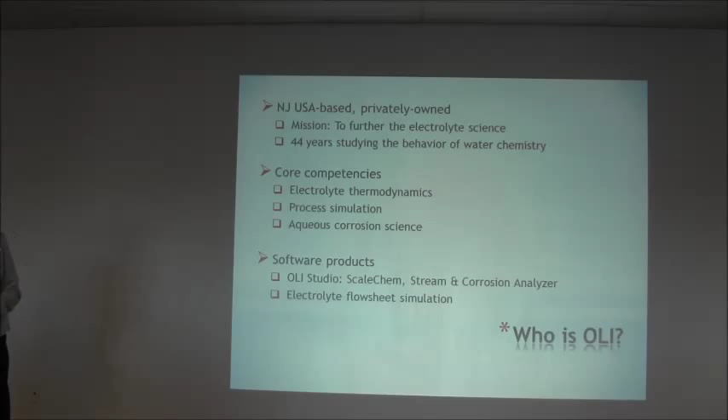Who is OLI? It's a very unusual company based in New Jersey, and it has spent 44 years devoted entirely to electrolyte thermodynamics. The founder, Marshall Rafal, decided when we met at Exxon that he was so interested in electrolytes because they're very poorly behaved mathematically. He became very interested in the challenge of how to converge electrolyte solutions, and that's kind of how the company grew.

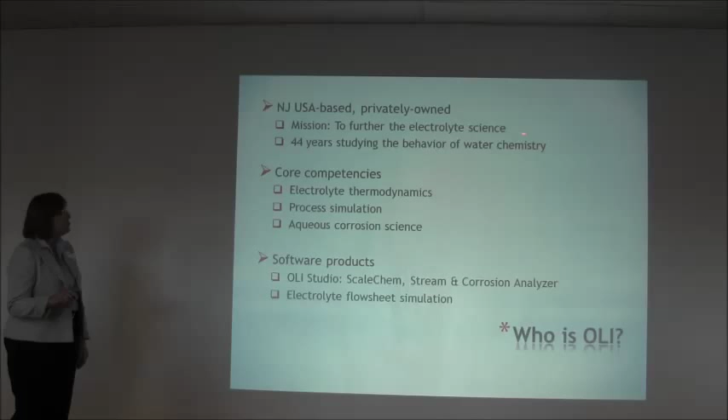So its mission, as I say, it's a very unusual company. Its mission is to further the electrolyte science. In a way, it's a quasi-university, but it does have a commercial arm. Core competency: electrolyte thermodynamics, process simulation, and we also do corrosion science of the chemistry in contact with bulk solution.

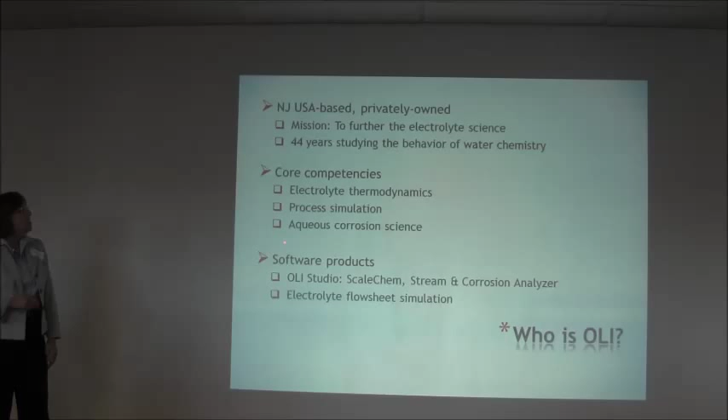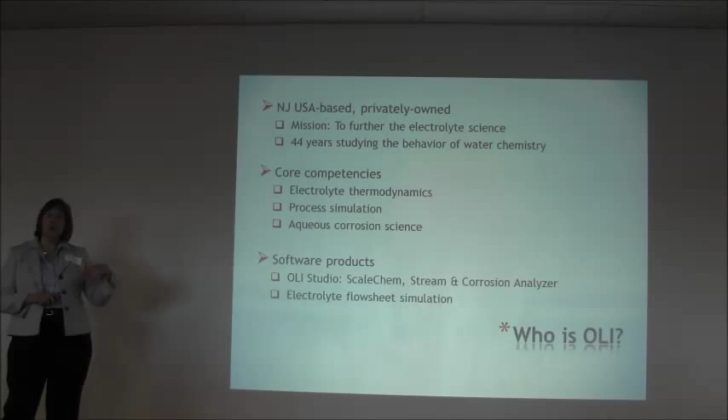Primarily, if you work with OLI, you work through their products. You work through either the OLI Studio, which has a bunch of software components, or you work through electrolyte flowsheet simulation, where you're developing a water plant and you want to work inside a commercial simulator, such as Aspen Tech or PRO/II, and they have their own simulator as well.

So what am I doing here? Well, actually, our mission is a little bit different. Our mission is to help clients address water chemistry issues. I'm a principal, my partner AJ is a principal.

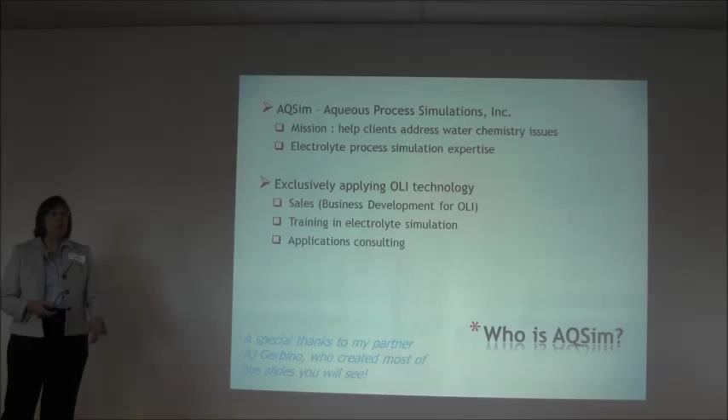And we have to thank AJ. He probably would be a better person to come because I want to talk about applications today, and he's a much better applicant, a process simulation specialist. But anyway, he's helping create most of these slides.

So what we're doing is we are basically trying to apply OLI. We do that exclusively with OLI technology for sales training and applications consulting. What we offer is electrolyte process simulation expertise.

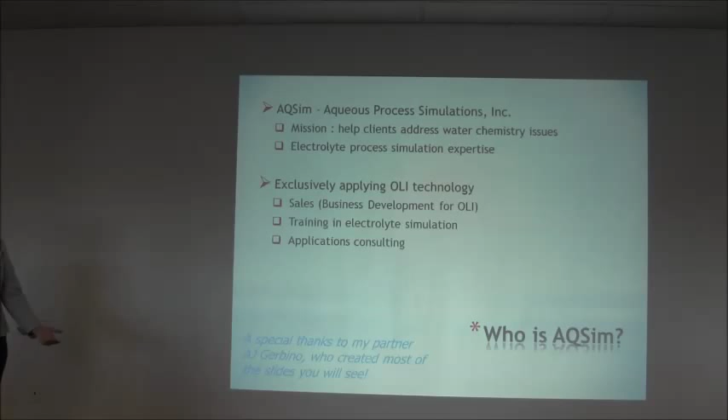Why do you want to use simulation, and especially why do people use simulation to begin with? What we're trying to do is duplicate a physical process, and we're trying to do that through what we call first principles, applying electrolyte thermodynamics. So through chemistry and mathematics, or physical chemistry, we're trying to duplicate what it is that you're seeing in reality. That can apply to production chemistry, it can apply to water treatment.

Why people want to do it is if you can duplicate a physical process, then you can identify problems before they occur, although a lot of my case studies are talking about problems after they occur. You can also predict where to treat for scale, find safe ratios if you're mixing waters, and also screen out different treatment methods.

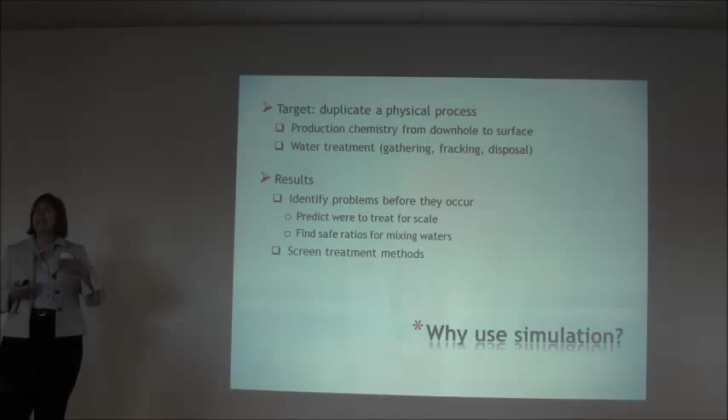OLI is more focused on understanding what the problem is than on understanding what the solution is. But you do have to understand the problem before you can find a solution, and they're really good at ferreting that out. We'll talk more about that.

I really want to thank Steve and Vince, especially Steve's talk, because he took a lot of the pressure off me in terms of saying what is scale, how does it develop, how are particle sizes, et cetera. So we don't have to go too much into that, but we'll go a little bit into the underlying science. Then we'll talk about the limits of when you have this kind of model, when you're worried about scaling, what are the limits of scale prediction. Then we'll talk a little bit about case studies, and then some of the challenges.

I have two parts to this talk. This is the first part, about scaling. I'm going to give a little bit of talk, and after we talk about scaling, we'll move into corrosion simulation. OLI fits high-end. It's high-end in scale prediction, and it's high-end in corrosion prediction.

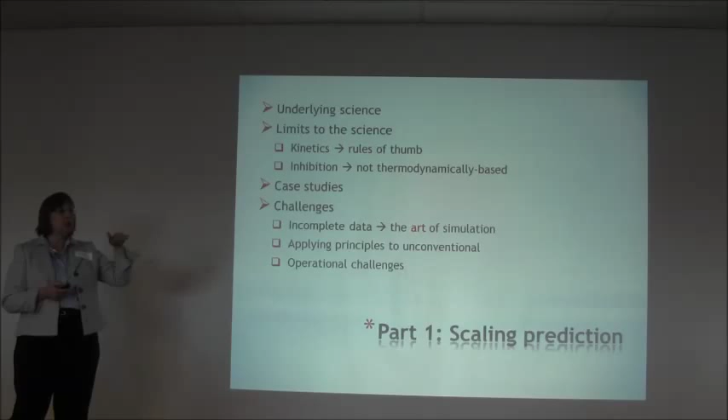Our corrosion tool is a little bit of a research tool. Our scaling tool is much more applicable to day-to-day problems. But we'll talk about both.

So we've already understood this: scaling tendency. What we call scaling tendency is the thermodynamic driving force for a solid to precipitate. Thermodynamics works on energy, it's all about finding the right energy of a state. So what we say is a scaling tendency greater than 1 means it's going to precipitate.

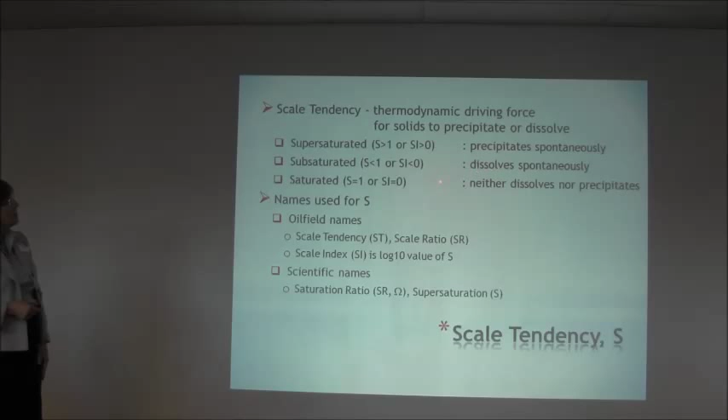Less than 1, it's going to dissolve. If it's at 1, at saturation, which is an important part that determines your solubility, then it's not going to dissolve or precipitate. We call it scale tendency, scale ratio, saturation ratio, or supersaturation. If you see the word 'index' in a scale tendency, it means that it's the log. So we work with the scale tendency as a number, and you can also work with the log, which is called the scale index.

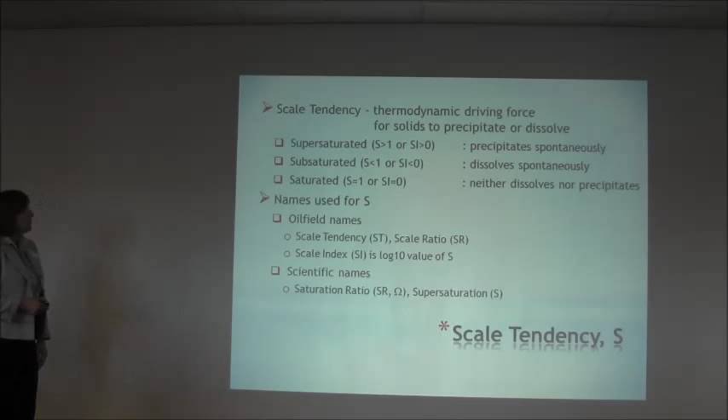We've talked a little bit about Langelier, Stiff Davis, Oddo-Tomson. We could start using scale calculations, we can move into empirical methods, and then we can move into the full speciated model. So when you're working with a simplified model, you can calculate this.

Classically, what they have been is to calculate a measured concentration divided by the concentration at an equilibrium state, and if it's greater than 1, you're going to scale. So that's been the kind of rudimentary way you could say it.

When you look at it from a thermodynamic point of view, what we're saying is the activities divided by the solubilities. What does that mean? So in thermodynamics, we talk about a reference state and then an excess state. We talk about an equation of state to define an ideal state, and then when you're past that, we talk about excess properties. So reference state, excess properties.

Because that means that ions are not attracting each other. Infinite dilution means that there's no effect, they're not having an effect on each other. When you're in the excess properties, when you're in the activity state, ions are impacting each other. It's not just the calcite, it's not just calcium ions and carbonate ions, but it's all the ions in your soup are impacting each other.

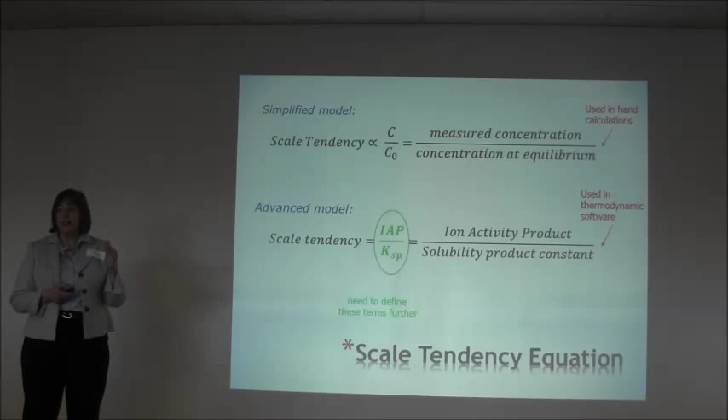So what we're describing is we're saying the activities, the ion activity product divided by the solubility product. And that's the definition of scale tendency in a speciated model.

Okay, a little bit more, and then we're going to stop with the slides. So if we just take barite, and barite breaks into the barium and the sulfate ion. And so then here we're looking at activities. Activities are based on the molality of the solution with the activity coefficient divided by the K value.

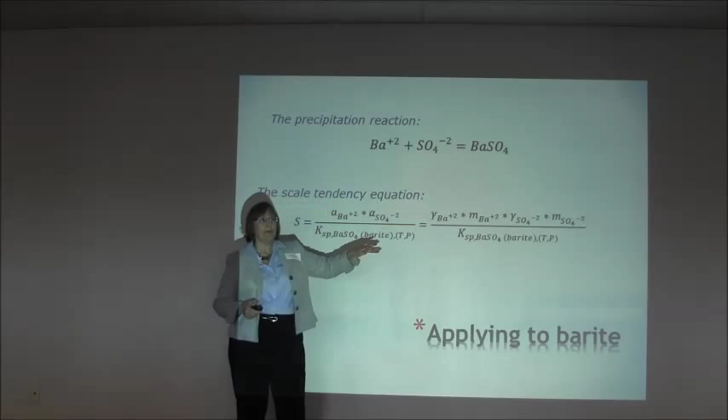You don't really need to remember this. All you really want to think about is activities divided by solubility, excess properties divided by reference state. And that's actually what produces the scale tendency on a first principles basis.

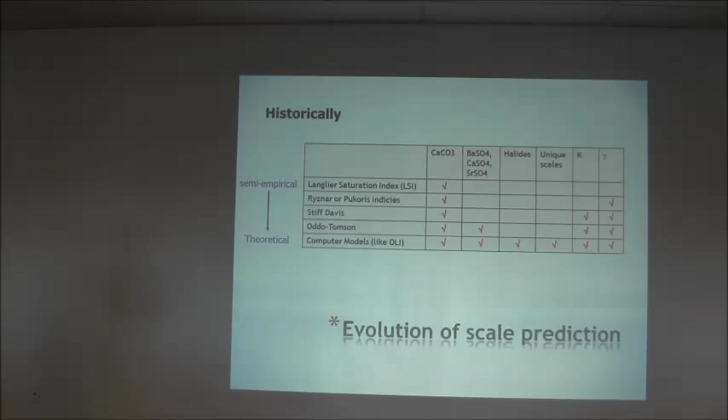So we talked a lot this morning. I was like biting my tongue. And I also am just totally embarrassed to say that I should have had French Creek in here, and I really apologize. And if anybody goes back and tells Bob that I didn't, I will come find you, because he really should be in here too. And I don't know why he's not, because this blah blah. Anyway,

So why do you want to use a computer model like OLI, or why is it important? There are plenty of good indices.

Langelier did have some problems. It went down to Stiff Davis. They fixed it. Stiff Davis was taking more of the common ion into effect, so he was staying over there. Oddo-Tomson is great, that actually is the Rice University Brine Chemistry Consortium, and they actually worked really well on a lot of their solids.

And a computer model like OLI, what is the advantage? I would say, by the way, Oddo-Tomson's probably in this box already, but I don't really know. But basically, when you have things that are not predicted in your water, if it goes beyond the standard oil field scales that we've studied traditionally, then it's really good to be in the speciated model to be able to just account for what's in your water sample.

So it's a higher tech way. Once you've got all those great water analysis methods that Vince was talking about, it's a higher way to get into, a more precise way to get into an actual scale tendency.

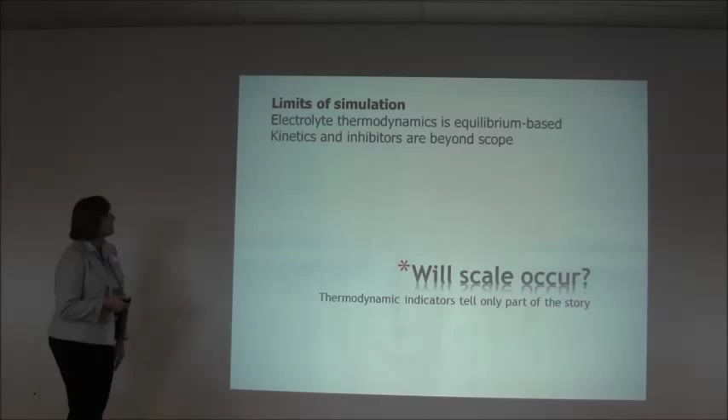Okay, that's all the good news, but there is some not so good news about scale tendency, which is it's only equilibrium based. It has a huge disadvantage in that kinetics and inhibitors are beyond the scope of a thermodynamic model. I'll talk a little bit about why. It's easy to understand why.

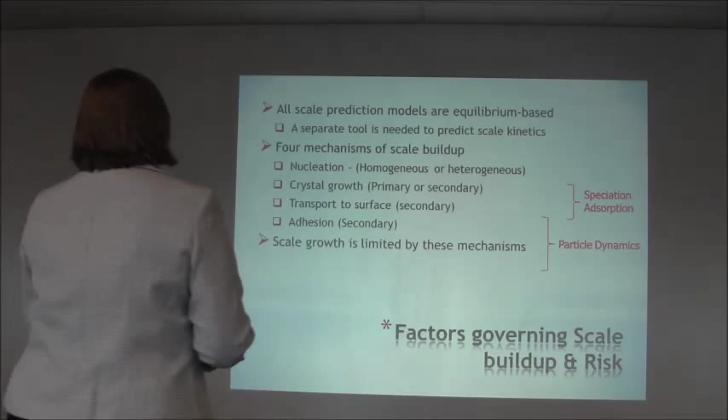So all scale prediction models are equilibrium based, and you need to add on something to calculate kinetics. Kinetics can be pretty simple. We'll talk a little bit about what that could be. I'm so glad Steve talked about this because I'm not going to talk about it. Actually Vince did too, the difference between a scale and a deposit.

We don't actually go there. We're only talking about energy, the thermodynamic driving force for scales to precipitate. Nucleation is an issue. Does it have something to latch onto? Is it going to latch onto the wall? I recall Vince's description where you put one drop into one piece of scale to let the nucleation start, and whammo, everything starts.

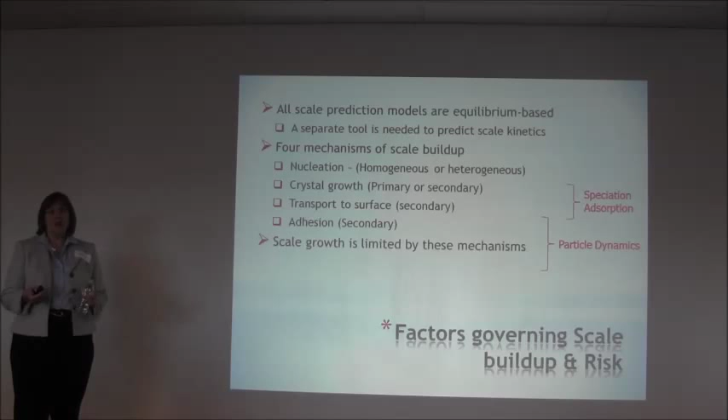So there's all kinds of mechanisms for scale buildup when you get to finally understanding what's going to happen. Is scale going to be a problem? All we really want to talk about as thermodynamicists is basically the driving force: do you have a problem? Is your system going to have a problem? And then sure, all these things are going to be hit to try to decide whether or not you have a problem in terms of crystal growth and things like that.

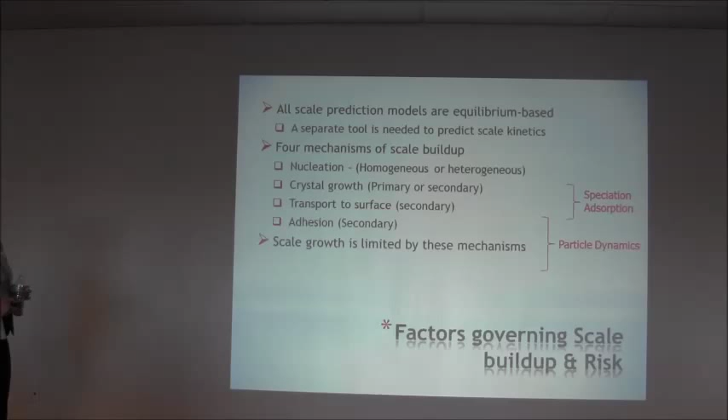So one of the things that we do as consultants, because remember I said that AQSIM has started to sell OLI software, we also consult with OLI software, so we're applications people.

We take information like this, and we've created this particular slide for our own reference, and what it's doing is for the oil field scales that we are most interested in, the halite, the gypsum, the calcite, the barite, and we've just developed timetables for kinetics.

This is a log-log plot of saturation ratio versus time, and the symbols are the scale tendencies, the saturation tendency ratio. So that means that your scale tendency on gypsum, for example, can be much higher. It can be up at 10 if your induction time, the time in seconds, is only going to be 10 seconds. What that means is if you have something flowing really quickly, it's not going to have time to nucleate and adhere. So even though we're worried only about the thermodynamic driving force, you can see that there's different ways that you can calculate.

Okay, even though the program said the scaling tendency is 4, is that a problem? Well, no, it's not necessarily going to be a problem. It depends on how fast it's flowing or how stagnant it is. It depends on a lot of things. So what we're going to tell you is it's 4, and then you're going to figure out, okay, is that important?

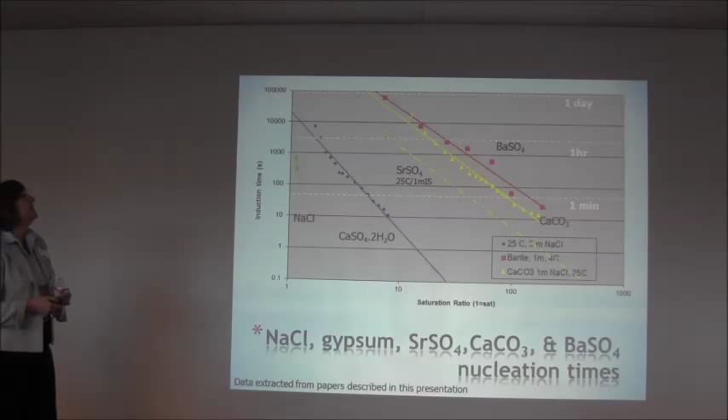Also, inhibitors. This is an interesting slide. If you look at the 3 curves here, this pink one, the green one, and this blue one, that's the growth of calcite on a metal without PPCA. Okay, so they put an inhibitor on this, and then you can see it's much better behaved.

So we don't do this kind of inhibition modeling. And why don't we do it? Because we had a great description of what inhibition's doing: it's not thermodynamic, it's not working on energy, it's working on interruption, and we don't model that. Our models don't do that. Scale tendencies don't model that. So kinetics and inhibitors, you kind of have to get extra. You have to get it, and where you usually get it, by the way, is from chemical treatment companies.

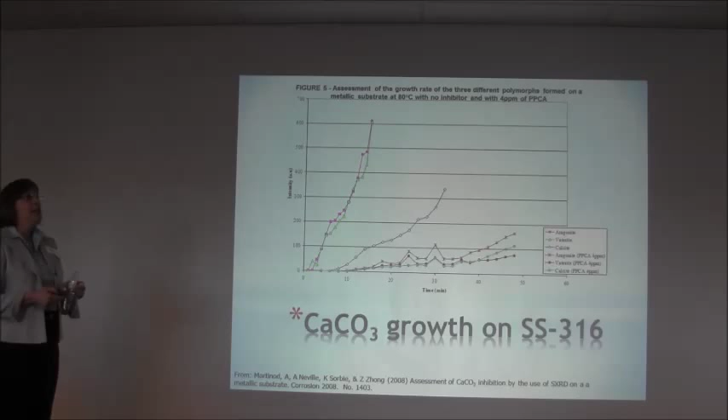But you don't really know what you have, so you don't know how to treat it. Your chemical treatment company doesn't necessarily know what you have, and that's really where we come in. So why do you need us? If you're going to go to the chemical treatment company anyway, why do you need us? Well, you really need to understand the problem.

I love Vince's things about the knowns and the unknowns, the known knowns and the unknown unknowns, and all of that. Because what OLI offers, and what a good scale tendency program can do—any program that can properly predict scale tendency or pH, and I do consider French Creek a good program like that—is give you what you need, which is mass balance and scale tendency. That, if you apply it correctly, will really show you what your problem is.

So let's talk a little bit about how we do that. We can use it as a simple well scaling analysis. We can use it if we're mixing waters and want to understand whether waters will mix compatibly or not. And we can do it for treatment after we've mixed, or after we've produced them. So that's why and where we want to use it, and let's look at how.

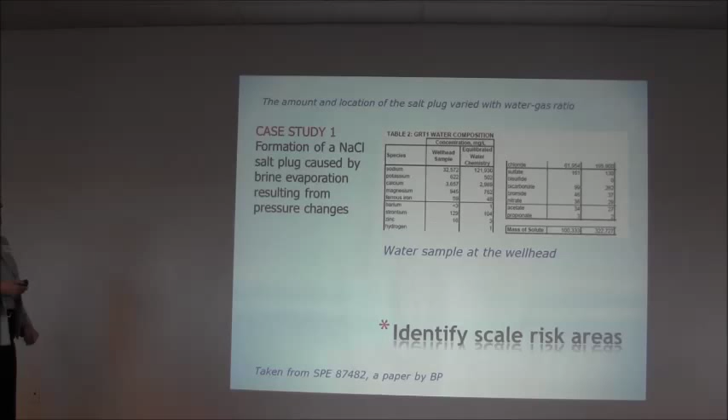Let's look at some examples. I have three examples in the scaling tendency set. Two of them we picked because they were already made as SPE papers. One of the problems with our industry is that everything is done under non-disclosure agreements, so we're limited by what we can say. The third one we picked, we've changed the names quite a bit, although it did happen in Australia.

But in this one, there was a well, and it was plugged, and they wanted to understand how to treat it. So before you just go ahead and do the treatment, you have to understand why it plugged and where. So they knew enough that it was plugged by sodium chloride.

And they had a water sample. I love how water samples don't really help very much. Because why don't they help very much? Because it's already done—like if you've been precipitating in your well, by the time you get to the water, there's nothing left. So it's kind of like you have to recreate it.

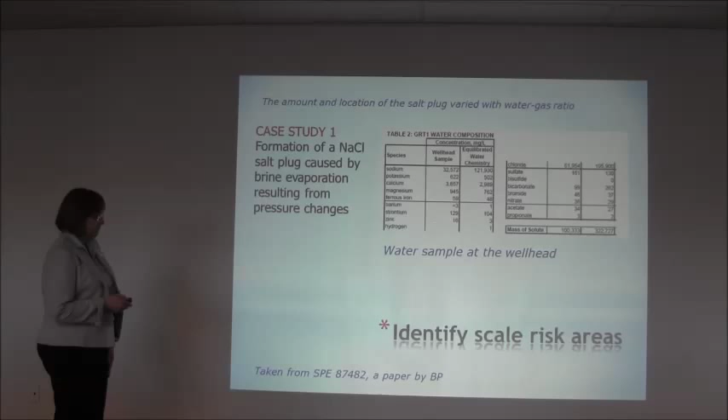So basically, we got a water sample. The water sample was pretty innocuous as far as we could tell, and it didn't really show any other problem. So what we had to do—and this is why I asked the question about formation—you have to recreate what happened. You have to recreate it from downhole up, or formation up.

Now how do you do that? Well, you have to know information. You look first at your well sample, but you also have to know information about your formation. So if the Marcellus Shale is all the same everywhere, then you know it. But if you don't know that, or if there's an area that's particularly a little funky or different, you try to understand what the formation is, and you recreate it.

You run a saturation calculation, and you recreate the reservoir—what we call the reservoir brine. So you recreate what the brine is, and then you pull it up through different temperatures and pressures. Now the strength of thermodynamics, and why thermodynamics is an important science, is that you don't lose mass, right? So we're going to keep the mass—we create it from the downhole conditions and pull it up through different temperatures and pressures.

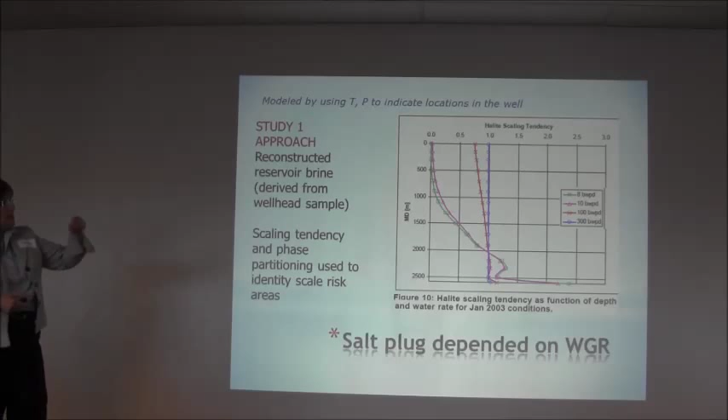And guess what? As it goes through pressure drop and temperature changes, the state of the solids is going to change. So what was vapor in the formation, as it's coming up and cooling, water's going to condense, things may get diluted, solids may form out—it depends on the particular solid. So the only thing we did here was reconstruct the reservoir brine, then pull it up through a series of temperatures and pressures. That's the approach.

This is what we call phase partitioning—that's the other thing, so it changes state. Thermodynamics says that if you understand the state of one situation by conserving its mass, you can predict the state over here, and over here, and over here. As the state changes, nothing else is changing; it just depends on what the energy of the system is. Temperature and pressure are being withdrawn or added, and that's what determines how you think about things.

So what we were able to do is create this graph of depth. Now, we didn't actually use depth in the program, because a program is totally talking about temperature and pressure with thermodynamics. So we only think in terms of state—temperature, pressure, and composition. We drew it through a series of temperatures and pressures that simulated the well, and we started to see what the scaling tendency was doing.

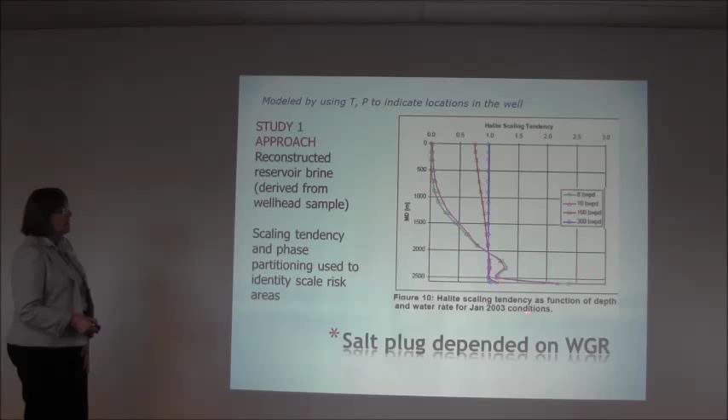So one, and then you can see it starts to come over here, and this is where the problem is. That's how this case was worked. From that we took the temperatures and pressures back, and we were able to understand that there were two places: there was a plug that formed entirely in the tubing at that particular spot, and then there was scaling along the tubing more, and then it also plugged up there.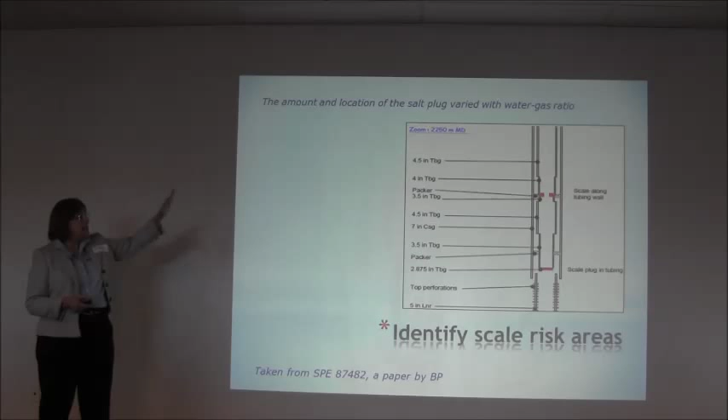We could do that by understanding temperature, pressure, composition, deriving a reservoir brine—because we understood about the formation—and taking that wellhead sample, coming down. So that's kind of how you get a scale tendency.

Okay, throw that one away.

This was a well in Australia, and it was corroding. Our client came to us and said, okay, we're seeing really crazy behavior—we're seeing carbonate scale in this horizontal section of pipe, and then as we're bringing it up, we're seeing all corrosion here. We have no idea, we don't really know.

So this is kind of like another detective case, right? We don't really know—should we change the metallurgy? Should we treat it? What should we do? Is it a particularly aggressive scale? Maybe we need to punt.

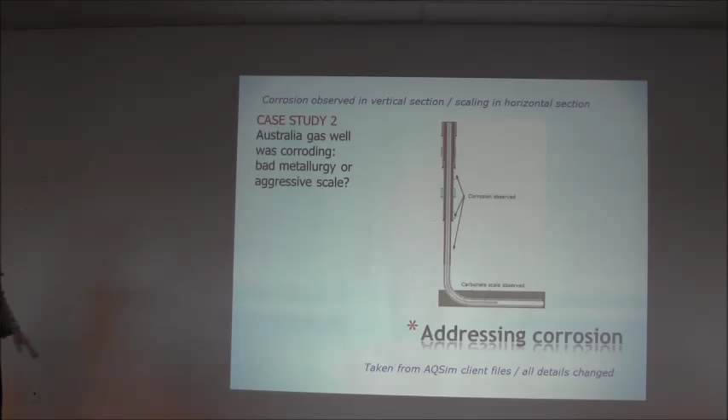So what we found was that this was really a case of alkalinity not really helping us, because alkalinity was dropping. Why was alkalinity dropping? Alkalinity was dropping because as we head back to that place and the pressure was dropping, carbonate scale dropped out. So carbonate scale dropped, but the carbonate wasn't bound in the solution anymore, so pH is dropping, right? So that was one thing that happened.

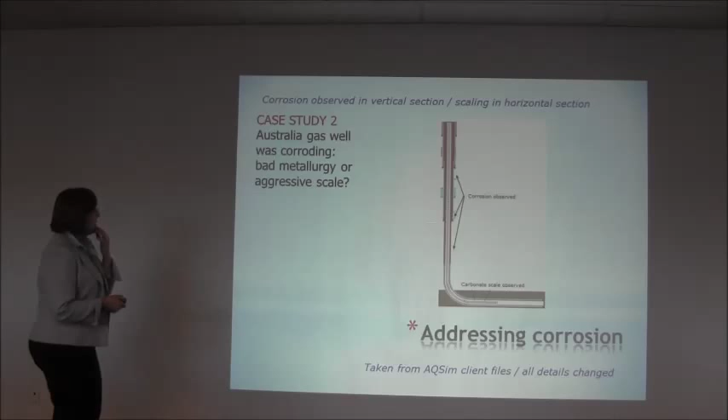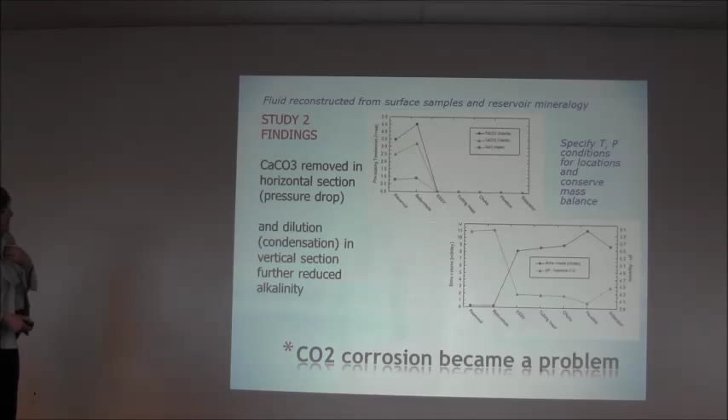Then another thing that happened is as we came up that vertical pipe, it started to condense, and that further diluted the alkalinity and the pH. If you look at the graph, you can see the pH just kind of went nowhere—it's this lower one. So the pH went down as first the carbonate left, and then the water came and diluted it. The moral of the story was that it was CO2 corrosion caused by lack of alkalinity, you can see.

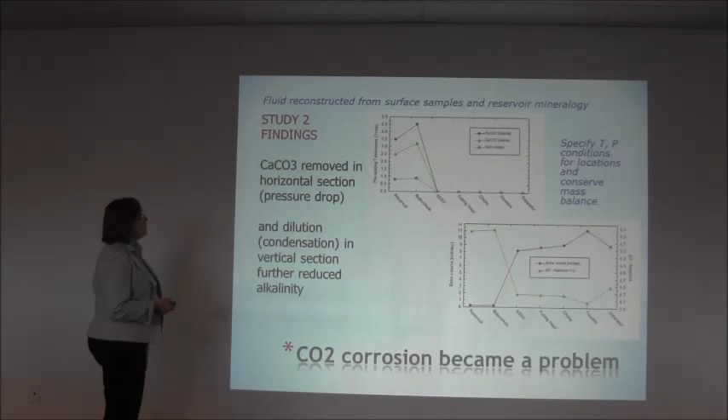And from that, they were able to determine how to treat it so that they didn't have to replace the tubing that they had, which was really good. That's another way to apply the scale tendency, really—that's all we're doing. We were looking at the changes of water and what scale is forming as we went along.

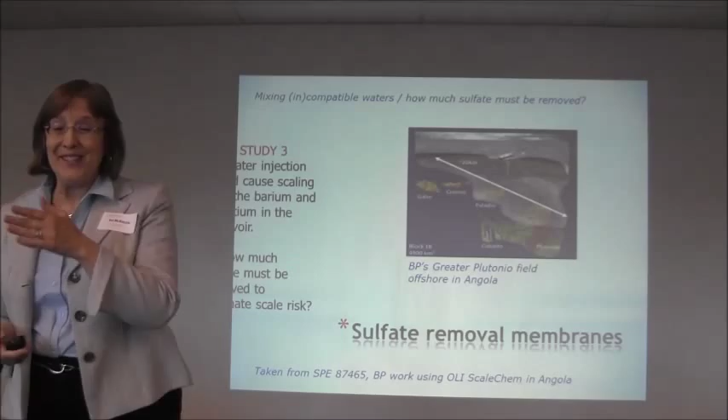Okay, this is an interesting one. This was in Angola, and what we were trying to understand—they knew that they had injection water. This is a little bit like fracking. They knew that they had an injection water and they knew they were injecting seawater because they didn't have any other water source, and they were going to put seawater into the formation. They were a little bit worried about barium sulfate because, as Steve said, barium sulfate is really very insoluble.

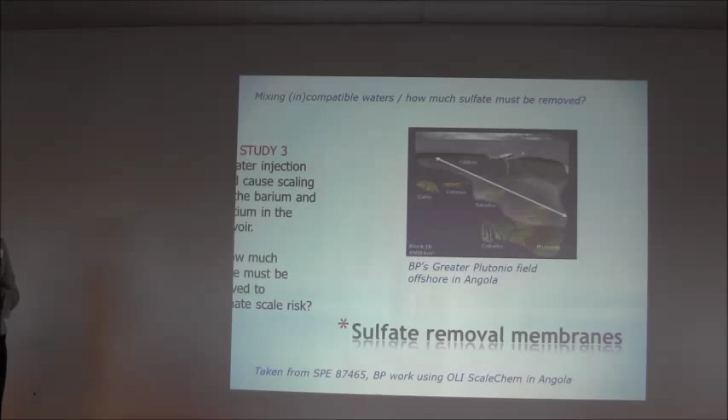So they wanted to—and they already knew they needed to do sulfate removal of their injection water—so they were already going to treat their injection water so that it wouldn't cause problems. And they wanted to know: how could they mix the waters? What was the safe ratio? That was the question.

Very bad news. The answer.

So what we wanted to do was simulate the mixing water. We calculated what at saturation the formation water would be. How did we know the formation water? Well, we knew where they were. They were in Angola, offshore, and we know what the formation is of the wells that we were treating there. So that was an advantage.

Again, it comes back to my question: do we go into the Marcellus shale and know what the formation is? Because what we did, since seawater was the only water source, we were able to calculate by mixing waters, and we did all these percentages.

So we said, okay, if we added 0 to 100% seawater, is there any chance we could leave 2,700 milligrams of sulfate in the water? No, no chance, don't do that. You look at your scaling tendency - this is scaling tendency, this is the percentage of seawater. That's not going to work. We just kept running it and running it. We got down to the point where 95% of the sulfate had to be removed, meaning there was no compatibility. Those waters were simply never going to be compatible.

How do we know that? We know it just by temperature, pressure, scale tendency, and that kind of gives you a good problem description so that you can take it for treatment.

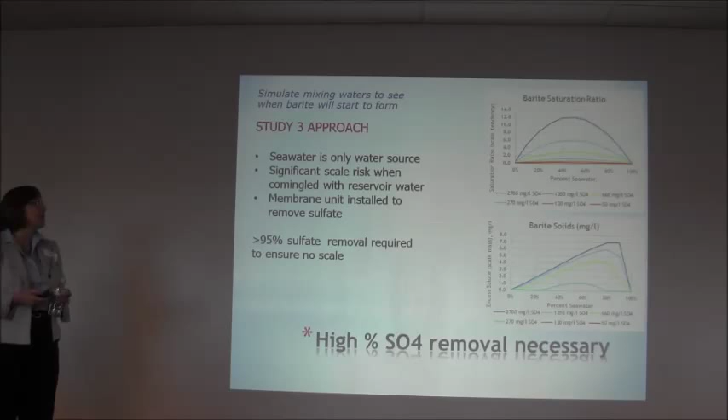Okay, that's all I'm really going to talk about there. I didn't actually have an example - I wish we had an example of produced water treatment that comes after, either in disposal, trying to get rid of the water, clean it up enough so you can put it back to wherever it came from. Because we can also help there by doing specs, specking up what has to happen to get 10 parts per billion into a particular phase. And that's also something thermodynamics can help us with.

Challenges. I loved the talks this morning about water samples, because fortunately it's not my field, but actually you have to have - I love this - a representative water sample. That's not always easy.

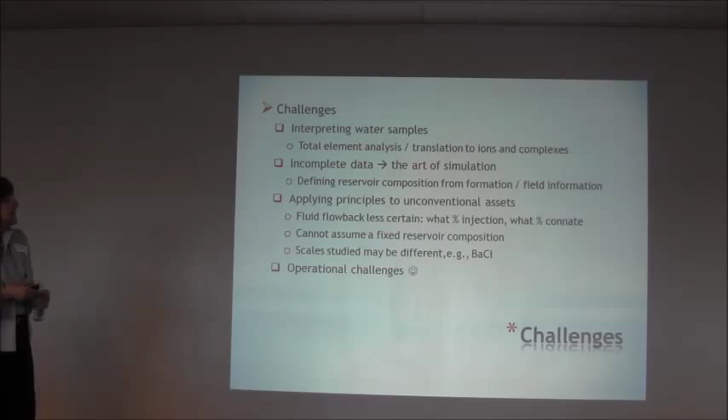It changes over time, it changes over place. You get it back in total element analysis. One of the things about working with scale tendency is that you have to translate, because we're thermodynamicists, we're working in discrete components. So you just can't tell us my total iron is 500. We have to understand, is it iron 2 or iron 3?

How do you know that? Well, there's ways that we know that as thermodynamicists. We know if your pH is 6, then you're going to be iron 2. If your pH is high, we know by the other conditions whether it's iron 2 or iron 3. But still, there's a translation issue. And that's one of the challenges - translating what a water sample is into ions and complexes so that you can use this tool.

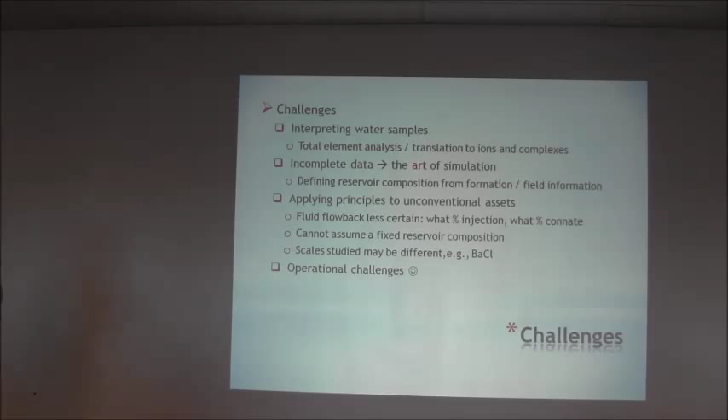The incomplete data problem. We have it really easy in conventional assets in that we really feel confident with the reservoir compositions that we can make. We can saturate a system, so we can say, okay, I know I'm in a limestone formation, I'm going to saturate it with respect to whatever solids I know are going to be coming, that I've already known - it's a known field. And that gives us a starting goal, and then through mass balance, we can track that sample as it's coming up, and we really can have a feeling for understanding how the state is changing as it comes up.

If you don't know your reservoir composition, or if you're not really sure about what exactly is the water you're treating, that's an issue. So there's some educated guessing that you have to do.

I think the other thing about incomplete data is largely gone, but it can also still be an issue, and that's one of the reasons I was asking about water sample issues - because in the old days, when I first started in this business, people would order tests, I'll test for iron, I'll test for whatever, as opposed to just doing here's the whole enchilada of everything in my water sample. I think that mostly we don't do that anymore, but that used to be a problem as well. And I love the idea of don't collect your sample in a soda pop bottle. That's a good tip - that leads to operational challenges.

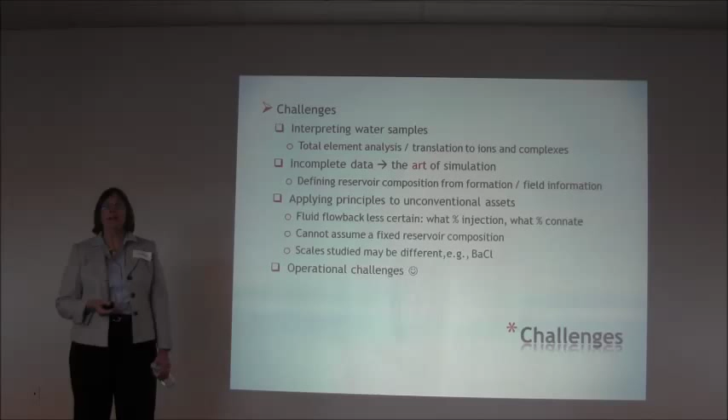Can we assume? She would say we cannot, but can we assume? We've worked a couple of unconventional assets with a particular client. One of the things we found was that the scales he was being impacted with are not the same scales that barium and chloride... it really just kind of blew our minds how barium and chloride behaved. I guess there was no sulfate, and barium and chloride became a player, but we don't normally see that.

So we get back to the scale tendency programs. If your scaling tendency is barium chloride, good luck with most scaling tendency models. That's one of the reasons the speciated model is the high end.

And then finally, operational challenges. Don't put your sample in a soda pop bottle. Don't get it exposed to air. A lot of trying to get an operator to do something that didn't get done, things like that. Those are kind of life challenges.

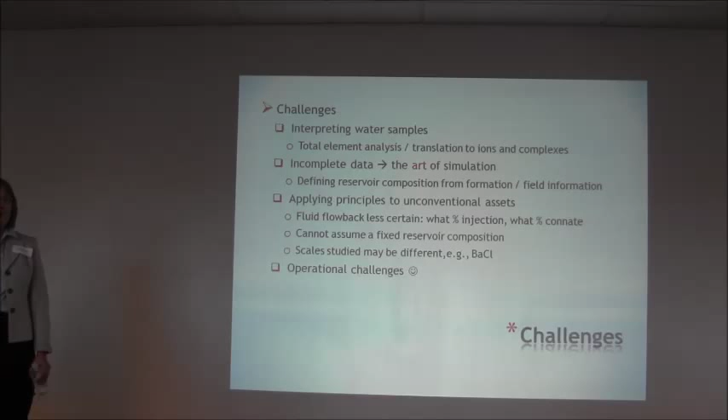I'm going to switch to corrosion now. Before I switch to corrosion, I can take questions, or I can just keep going. It's kind of a natural break, so I'm going to just keep going.

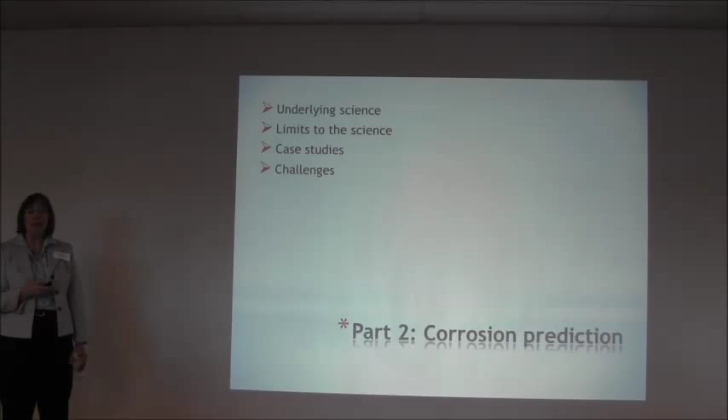Okay, I'm going to do the same thing, but remember I said applications and scaling, we are in the applied area of science 100%. What I'm going to present to you with corrosion is much more in the research phase. It doesn't mean that it can't be applied, but it's a little bit more esoteric, and you'll see what I mean.

This is OLI's work in corrosion. We say that to really understand the chemistry component, we're not talking about erosion corrosion, we're not talking even about high velocity assisted corrosion. We're talking specifically about the corrosion that's in contact of the chemistry in the bulk solution with the contact surface. So that's a specific kind of corrosion.

And what we say for that is if you have the chemistry in contact with the bulk solution, you need to understand the solution thermodynamics. I gave you one of our corrosion examples where we had a corroding pipe and they wanted to replace it, because usually when you work with metallurgists, metallurgists just don't really care about the chemistry, they care about the metal.

So if they see corrosion, they say, oh, I've got a service issue and it's not good with the metal, so I'm going to change the metal. That tends to be a metallurgist's answer. So OLI is saying, well, okay, first let's understand what the solution thermodynamics is, and can we change the solution as opposed to changing the metal. So that's kind of where we start.

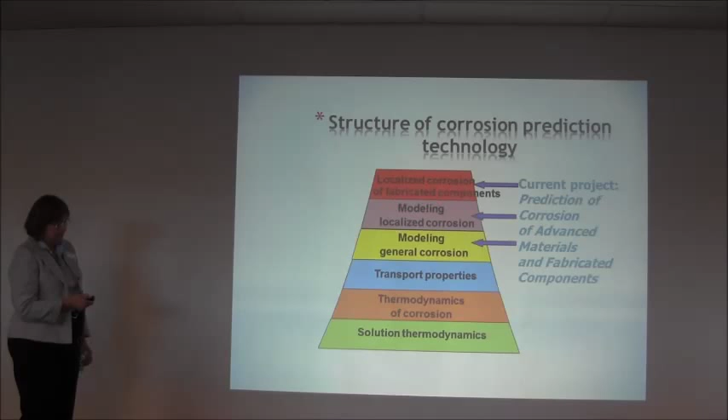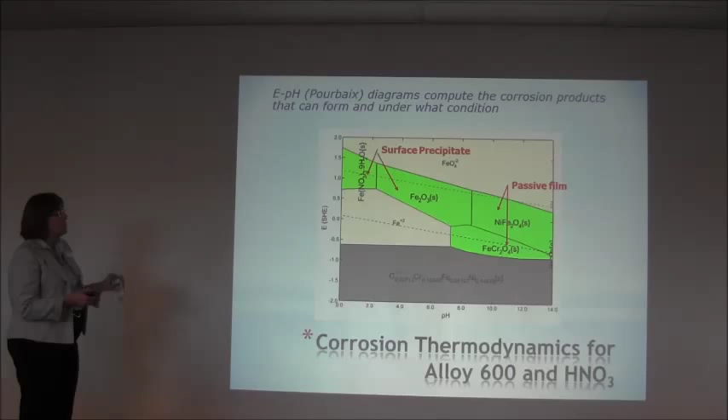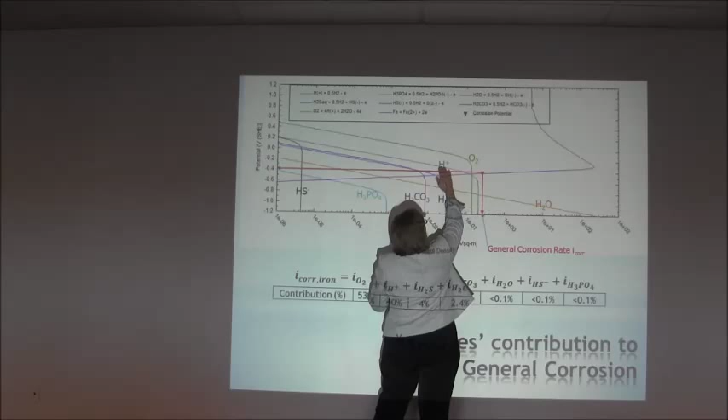And from that, if you interpret it, what you're getting down here is we're saying these two lines - take the line that's furthest out, this is the H ion, and this is the O2 ion. These two lines, which are the two active, or free concentrations in the solution, are causing 53 plus 40%, 93% of the corrosion at this point, due to H plus and oxygen. Well, H plus, that's low pH. So that's how you read the polarization curve.

Usually you get these in the lab. Material scientists would produce this in the lab, but you can generate it if you have a good thermodynamic model and a kinetic model on top of it. The kinetic model is basically determining these diffusion limits.

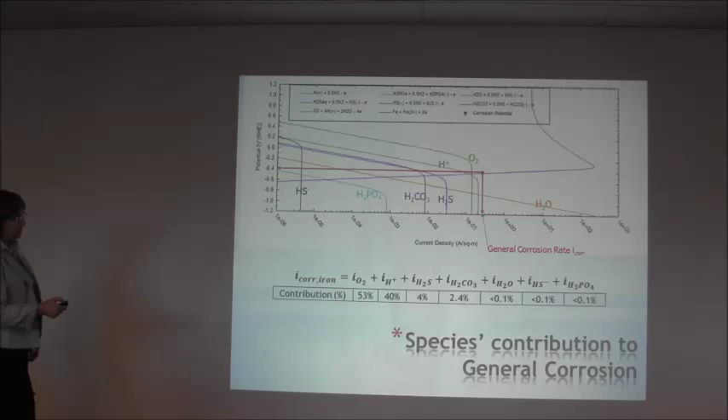And this is just an example. So from that graph, we can basically calculate a corrosion rate. So from all those underlying species and the contributions that each one of those species is giving into the corrosion model, we can calculate a corrosion rate.

And this is a typical corrosion rate calculation. And what we're looking at is a passivating film. As more nitric acid forms, we're moving into a passive state. So the corrosion rate gets high, and then drops and becomes lower.

Would I believe this? Is this something I would take to the bank? I think so, because what is it based on? It's based on a kinetic model on top of thermodynamics. It's very theoretical. What we've come to understand is maybe I'm not going to say my corrosion rate is 1 millimeter a year. But what I can say is, if I add more nitric acid, I'm going to be protected. So that's kind of how to read these, how to put it into a general rule of thumb that you can take to a specialist and say I have a feeling we're going to get a passivating film the more nitric acid we add. So that's how believable I feel it is.

I think it's good to show trends, and I think it's good to show the underlying activities.

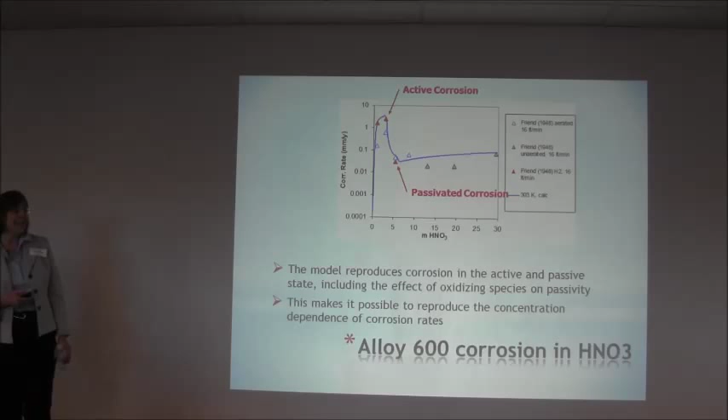Okay, we're getting close to the end. On top of everything else about the corrosion model, which is getting a little esoteric right now, one thing we're doing is calculating something called corrosion potential. Corrosion potential is the tendency for a pit to form. Then we calculate something called repassivation potential, the tendency for a pit to fill. What we say is that if pit-forming corrosion is faster than pit-filling passivation potential, you've got a localized corrosion regime. Who cares? Well, localized corrosion is about 1 million times more difficult than general corrosion. You really don't ever want to have a surface that's going to cause localized corrosion.

Well, how can you protect yourself from that? You can calculate a corrosion potential, you can calculate a passivation potential. Where are they relative to each other? The shaded area is the localized corrosion regime.

Why do you care? What does that do for you? Well, you can run it through and say, oh, that's interesting, I'm in a localized corrosion regime. I know that I was before, or something's not going to work. So I know it, but I've got to change it. That's another aspect of trying to apply science to a corrosion situation.

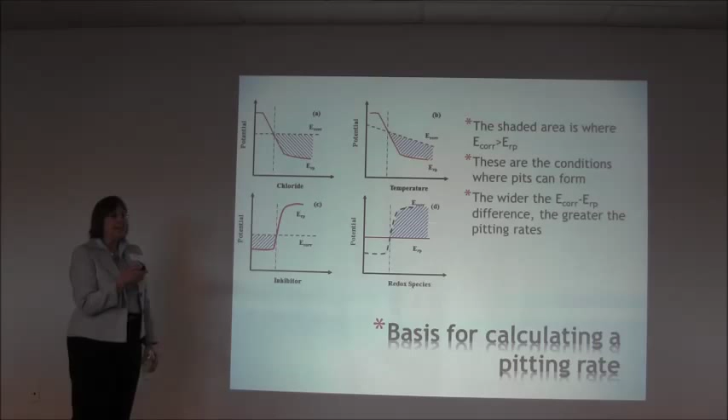At this point I should probably say that a lot of corrosion work is based on monitoring, inspection, and experience, because this is really more of a research tool than a practical application. But what we notice is that this kind of check is pretty easy to do, and it can basically get you talking to the person who can help solve the issue.

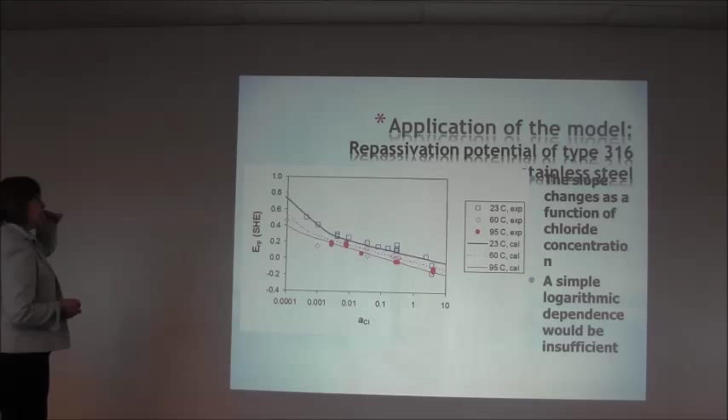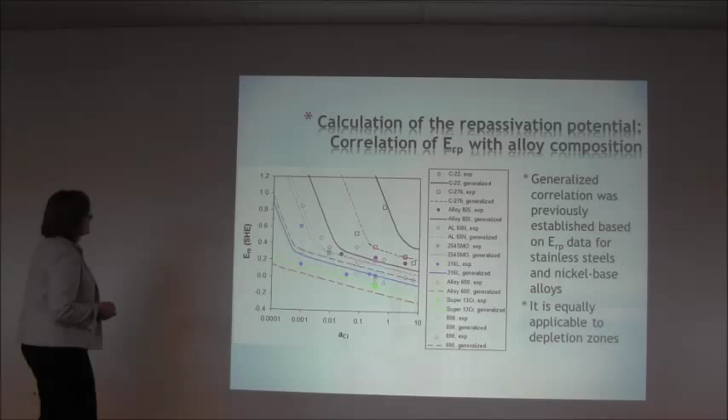Okay, I didn't know this slide was in there. Excuse me. I'll just skip that slide. This is interesting too. I think I had hidden those slides. They're both just applications of the model in a field I didn't understand enough about to talk about, so I'm going to skip that one too. I'm hoping I'll get to something I recognize. I think I'm going to just skip. If you have questions, you have them in your slides, or maybe you don't, maybe I'm the only one that has them. But I need to study them before I can give you any cogent information on what they are. I think they were more about applying our theory to different kinds of metals over different conditions.

Let's talk about something more solid. Let's talk about how you can do it in industry. And this is one thing I want to talk about before we go further.

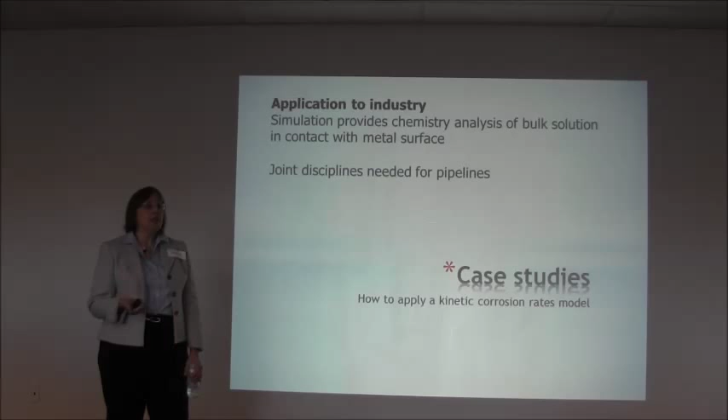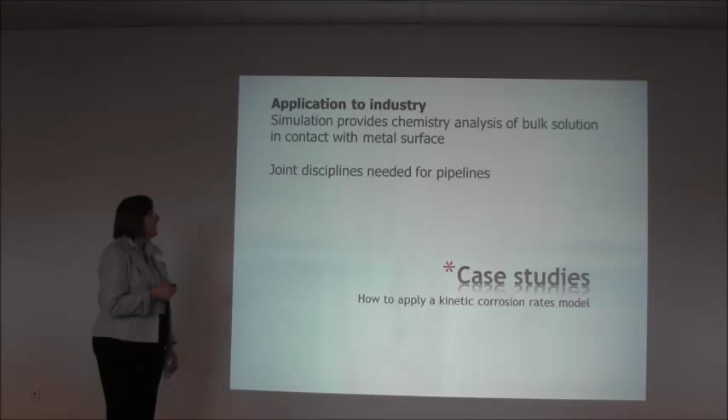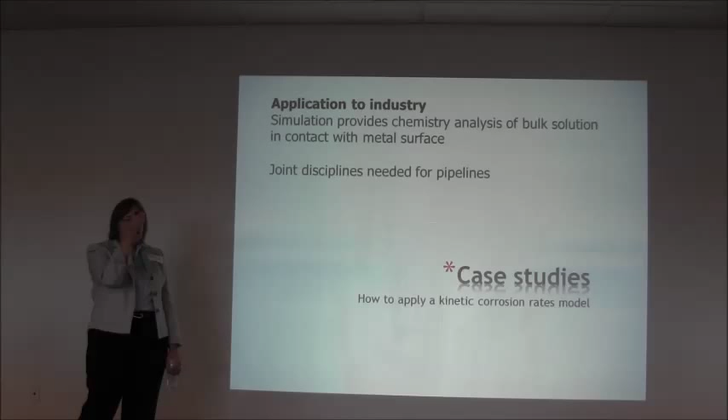The science of fluid dynamics or fluid flow is such a different discipline, its own discipline, so that when you're doing pipeline work and trying to understand scaling or corrosion of a pipeline, it doesn't really matter whether it's scaling or corrosion, thermodynamics doesn't have a lot to say about that. So if you're going to use more science in that approach, you have to partner with a fluid flow model. Then from the fluid flow model, at a given condition, say you had a pipeline, you could say at this temperature and pressure, because thermodynamics always relates back to temperature and pressure, and at this flow regime, calculated by the fluid flow people, what's the state of the corrosion? What's the state of the scaling? So that's really what OLI says about the science of corrosion or scaling in pipelines.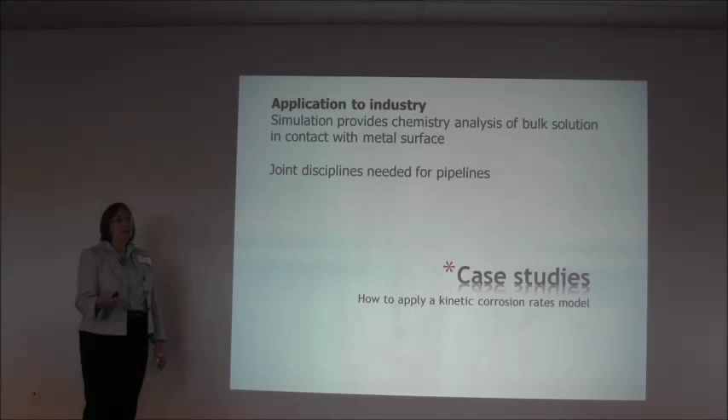It's a really important point. People will say to me, can you do it in a pipeline? Well, yes and no, but if you're doing pipeline work and worried about the flow of the pipeline, you really need to be in a fluid flow pipeline situation.

So I said before, we're looking at the chemistry analysis of the bulk solution in contact with the metal surface. That's what we involve for corrosion.

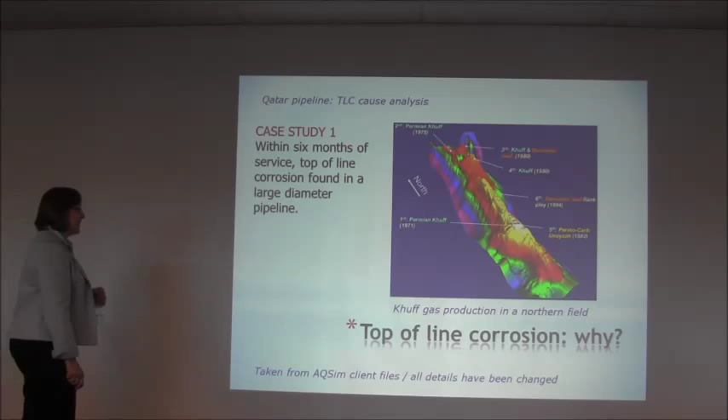We were involved in a very interesting case that took months of time, partly because we didn't know the formation, which was kind of crazy because we were in Khuff gas production in a northern field that had a particular formation that we didn't understand. And within 6 months of service, they got top-of-the-line corrosion to the point of failure.

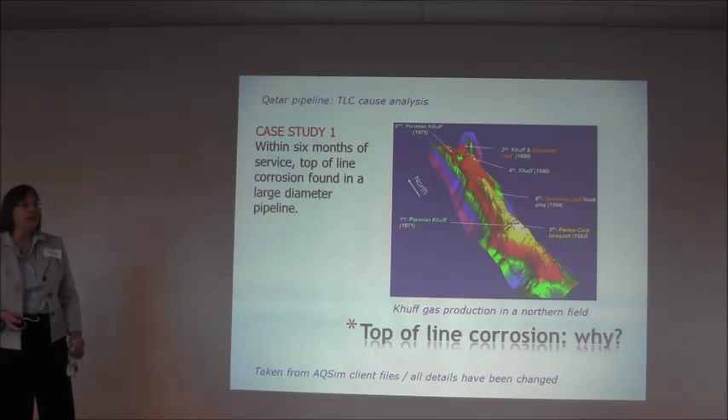It was in Qatar, and they tried to understand why. So we were called in. What could electrolyte thermodynamics reveal about that?

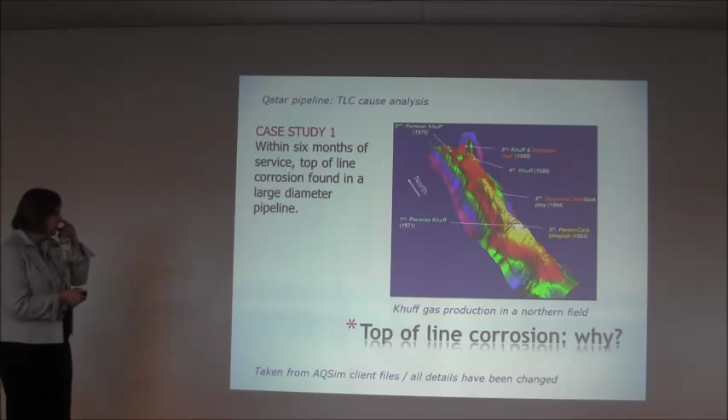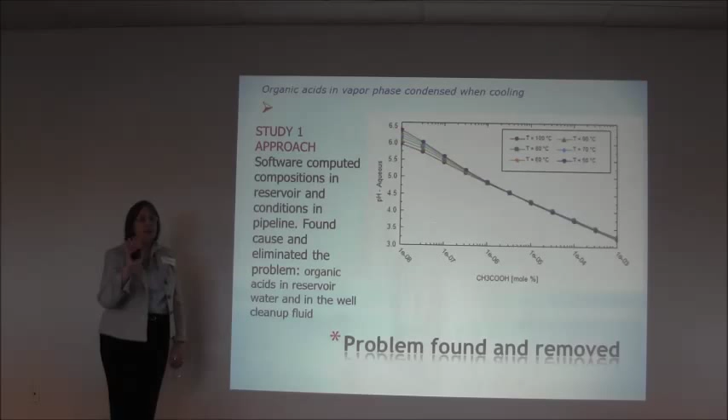So what we did was understand what were the reservoir conditions, what were the conditions in the pipeline. We used a pipeline program to try to understand it better. We did a series of comparative likely reservoir scenarios to try to pick the scenario that would make the most sense.

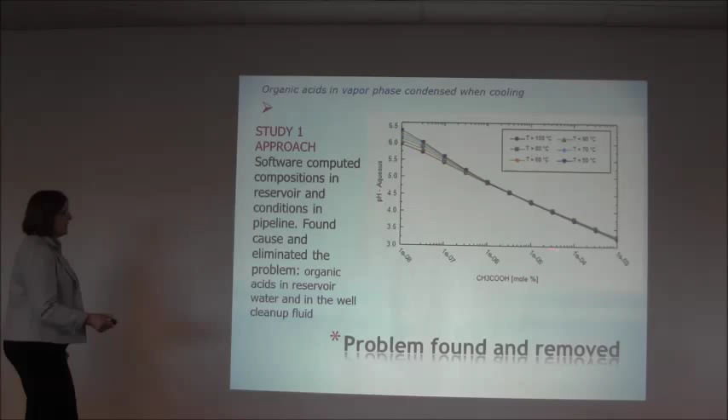What we found out was that good old acetic acid had been present in 2 different places. It had been used as the final cleanup - like, oh good, the last thing I'm going to do is flush everything out with acetic acid. Wrong answer, because the acetic acid then gets down into the formation and comes back. Also, acetic acid was naturally occurring, because they couldn't account for that much acetic acid. And basically, that was the cause of the top-of-the-line corrosion.

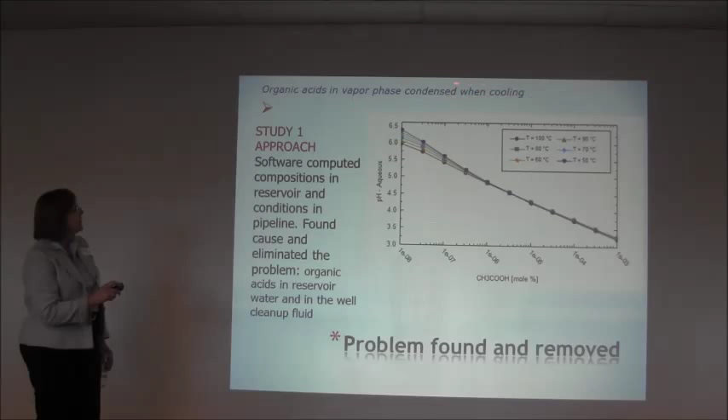What we were able to understand is where it happened in the pipeline. We could tell by temperature and pressure where the acetic acid condensed, and where the acetic acid condensed is where the top-of-the-line corrosion finally occurred. That's how we finally solved it, and we were able to successfully get them back in operation without having to change the entire equipment.

The challenges at this level of science, the corrosion modeling, is that it's a research tool rather than an operations or applications tool. Highly recommended for studying trends. I wouldn't really trust an absolute amount from it at this point, because you don't really understand what's going on in the field versus what's going on in chemistry and science.

That is a kinetic model that we saw, calculating corrosion rates, and it's being developed through a subset of chemistry and alloys. You always need to have a fluid flow model - if you're going to model pipeline flow, you can't get anywhere unless you have that.

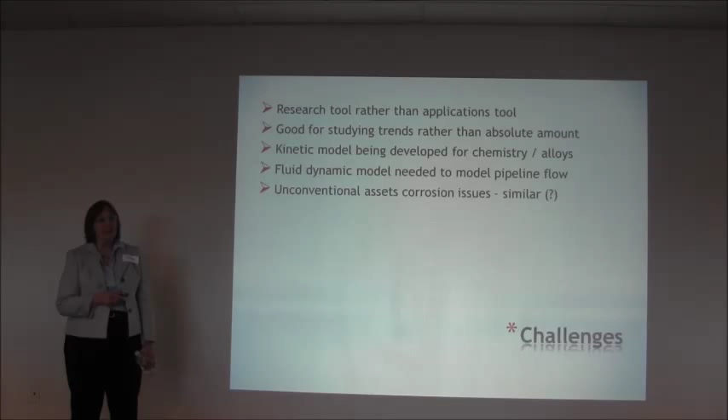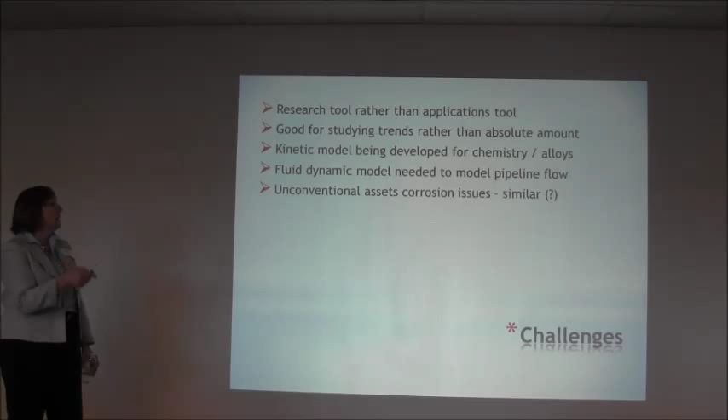We believe that unconventional assets and conventional assets are going to have similar corrosion issues. We've been working a little bit in this area, and we see it as the same. We see that the approach is the same, so there's nothing, no added challenges that we can tell at this point.

Okay, this is the summary.

Electrolyte thermodynamics could provide value added for scale analysis, especially in conventional assets, certainly in water treatment and water mixing. We need more experience to understand how we can work with the fact that the fracking water disappears - how can we get a state without that? I'm confident that we're going to figure it out, but we don't quite have it yet. We're still working with individual clients on that.

We see corrosion simulation in this particular model based on chemistry analysis. It's still primarily a research tool. There's a huge value, however.

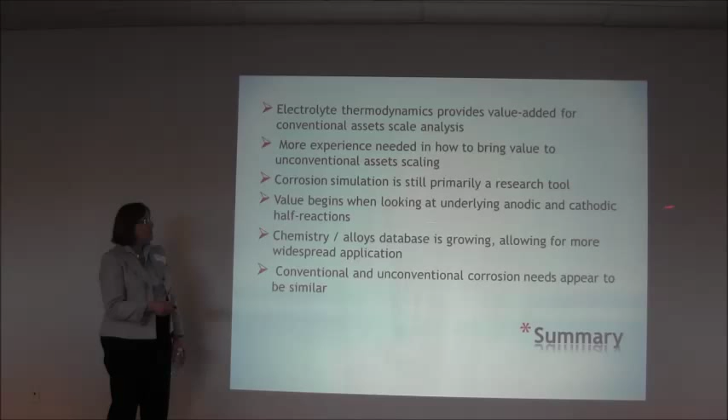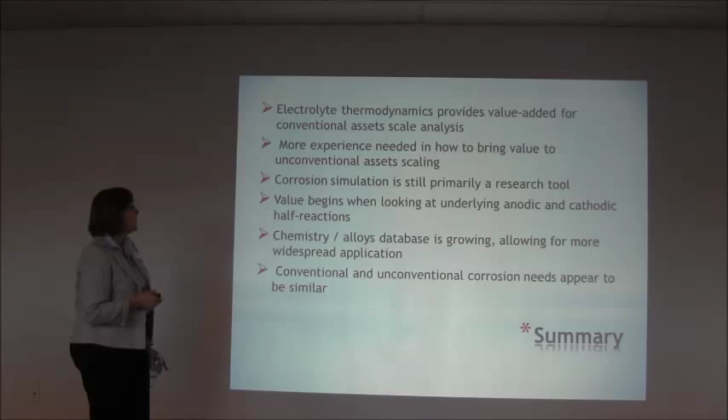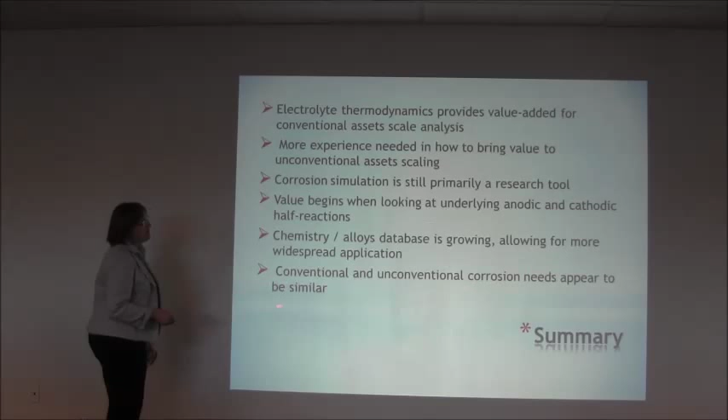Chemistry and alloys, we get to know more and more about them every day, and we believe that conventional and unconventional corrosion needs to be treated the same. Thank you for listening.